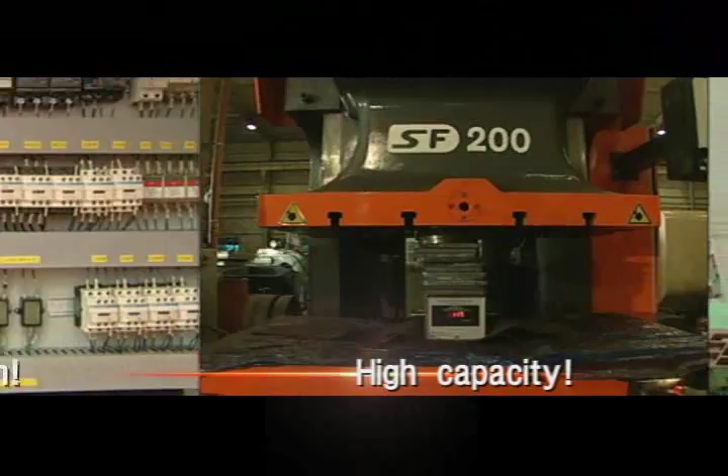We've been a leader of press-making companies in the 21st century. High capacity, high strength, and high precision. Dongshin Press prides itself on the best quality in the industry, representing the world's best press industry in the Republic of Korea.

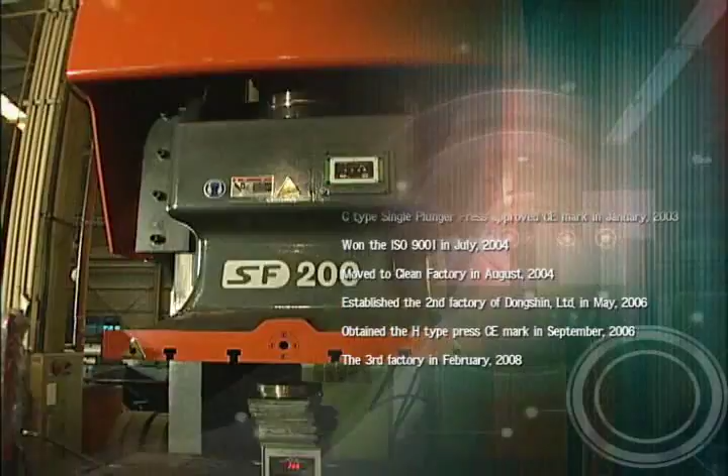A pillar of the Korean press machine. Since Dongshin Press was established in 1968, we have been producing the best press machines at superior quality. For only the press, Dongshin Press has been advancing toward a progression as a superfine enterprise of press manufacturing field that is built up on a technological know-how with justice and a substantial management.

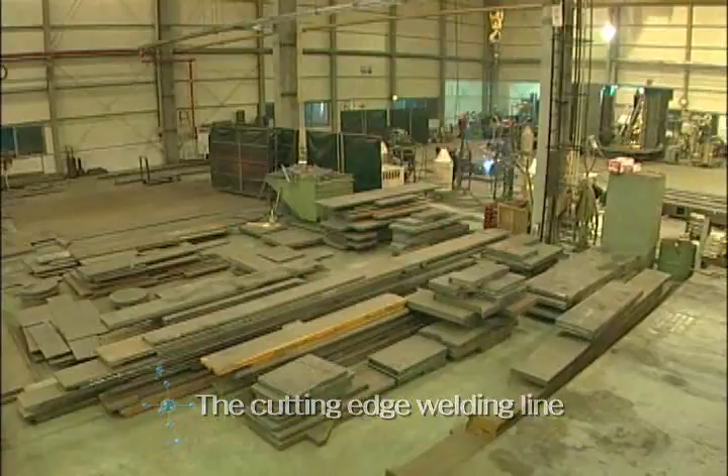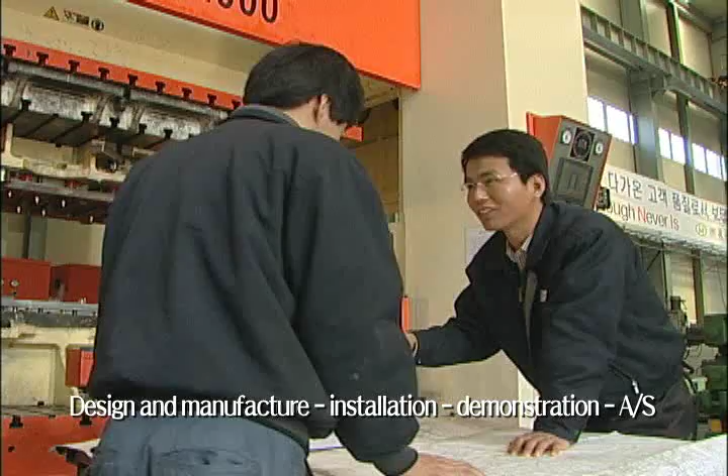We have high-tech welding lines, large high-precision processing lines, and the assembly lines with the best know-how. By managing all processes directly from manufacturing, installing demonstration to the AS, we are equipped with the internal systems to deal with a quick delivery in a timely manner.

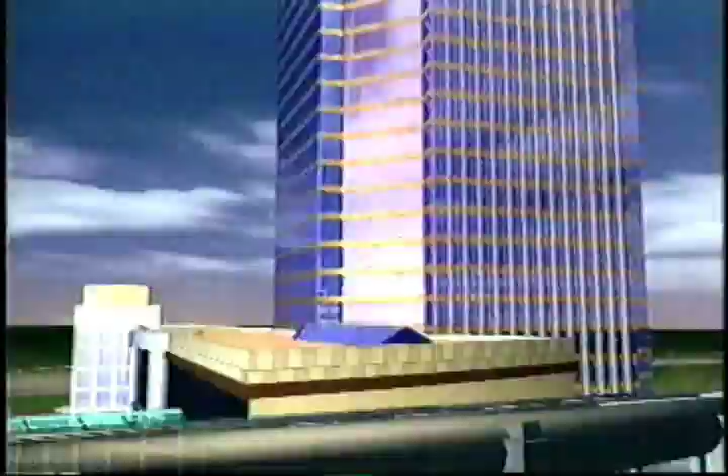Also, there are 3 factories running, including Dongshin Metal, a subsidiary company of Production Moldings, and 2 other factories that have finished the groundwork to complete construction in the first half of 2008. We are focusing on maximizing the productivity and enhancing the competitiveness.

Since the foundation to make the world's best press, our Dongshin Press has followed only one path. As the winner of many awards, we have been nominated the most promising of small and medium export companies. We have achieved a stable growth each year since the exports reached $3 million in 2003.

From the CE certification that meets the world standard to the ISO 9001 certification in order to build a quality control system, we are obtaining a superior position in the market with the recognized core technology, making it possible to run on the highway of marvelous growth.

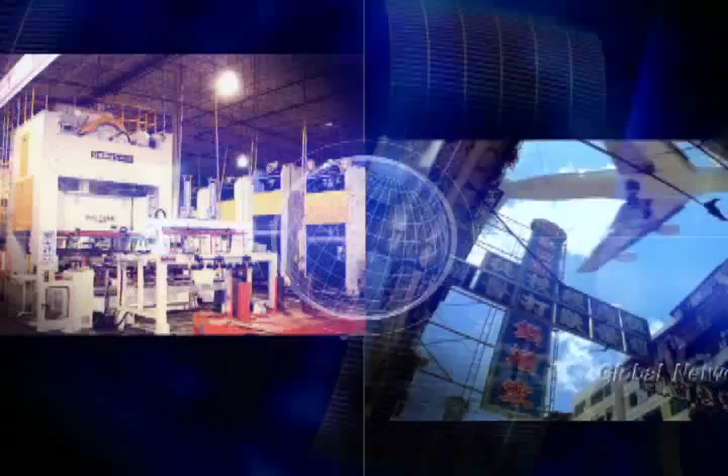Dongshin in the globalizing world. Dongshin Press has looked to the overseas market since 1999, starting from Southeast Asia market and now even to the ones in America, Europe, Russia, China, and Japan, etc. We are exporting to all countries of the world, and so far we have exported more than 300 units to over 30 countries around the world.

However, we are continuously endeavoring to have a constant investment on products and sales, as to open up a new market, increasing our market share with our accumulated know-how. High techniques with competitiveness. Dongshin Press, practicing a pioneering to reform with high technology.

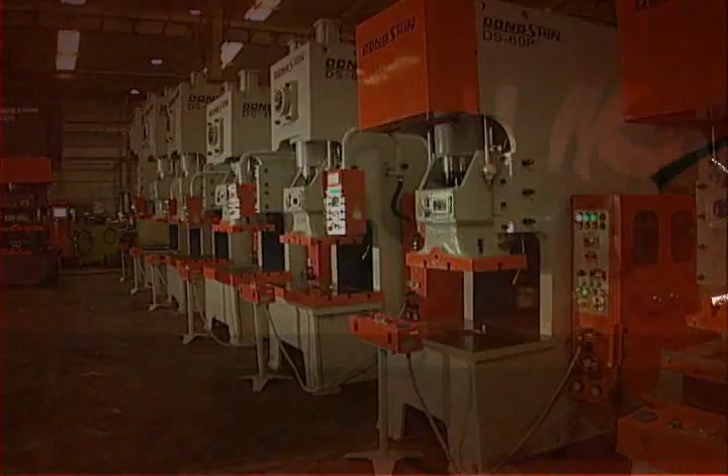With an idea that the second-place product technology cannot survive, we are implementing a non-stop research and investment for a product development along with a quality improvement. These constant efforts lead to the unique technique of our own that is proven by Dongshin's excellent products.

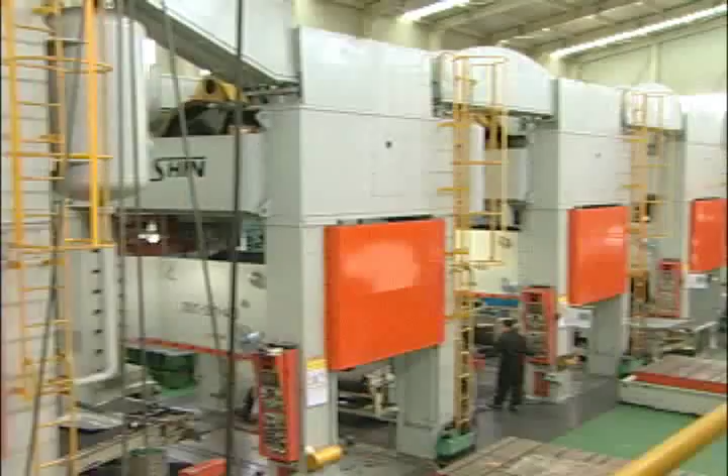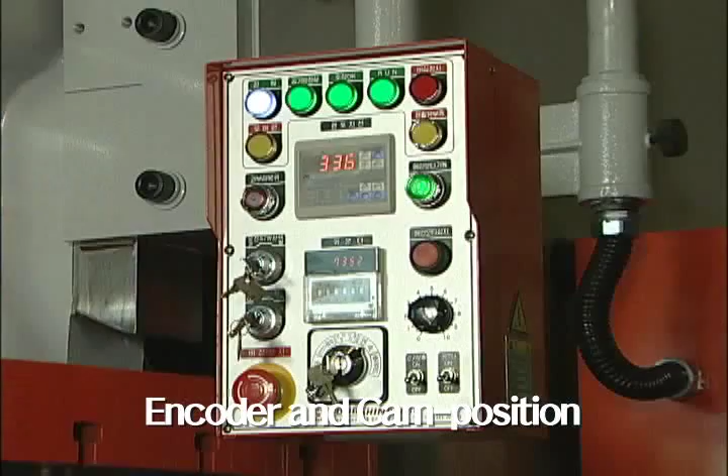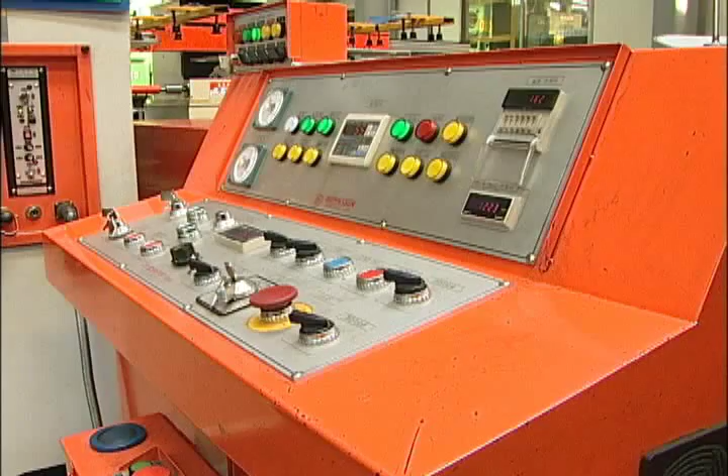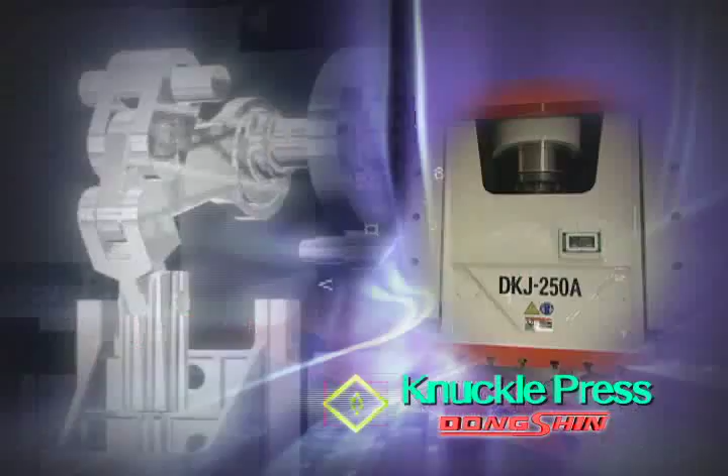Moreover, through a distinguished manufacturing from other press companies, Dongshin Press is making an effort to make a more practical product with strong durability. Revolution of the Korean press, Dongshin Press. By a pause motion stopping at a low dead point using knuckle tools.

When the machine starts to operate, it has a reduced vibration with a solid frame structure that functions based on a strong power and fits well to a high-precision product in which flatness matters significantly. Due to the recognition of its high price in the past, the demand was scarce, but it was reborn with an affordable cost after passing constant development. Now it's been settled as a Dongshin Press new strategic good.

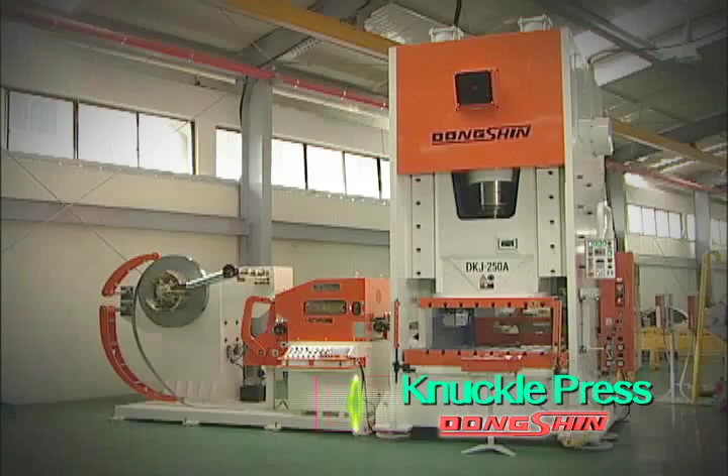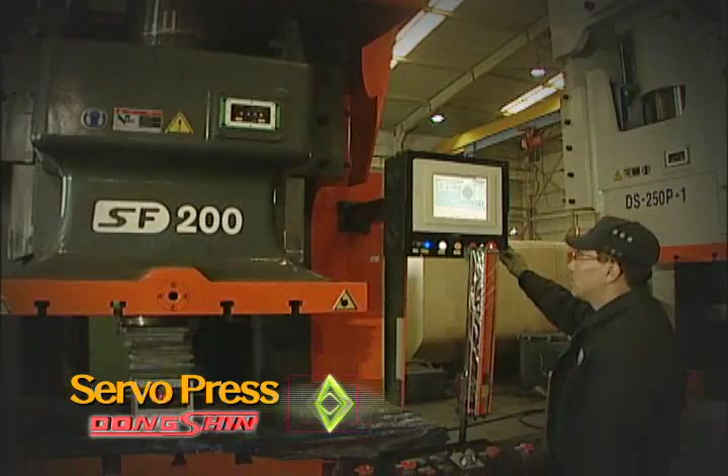Servo press is a product that can be customized for operating press motion as an alternative in the press market. It was studied and developed by Dongshin Press's own technology. Dongshin's efforts on popularization in the press are being continued. Given that servo press was developed in order to cope with various fundamental material changes in the future, we strongly believe that it is to be settled as a mainstream model for the future press market.

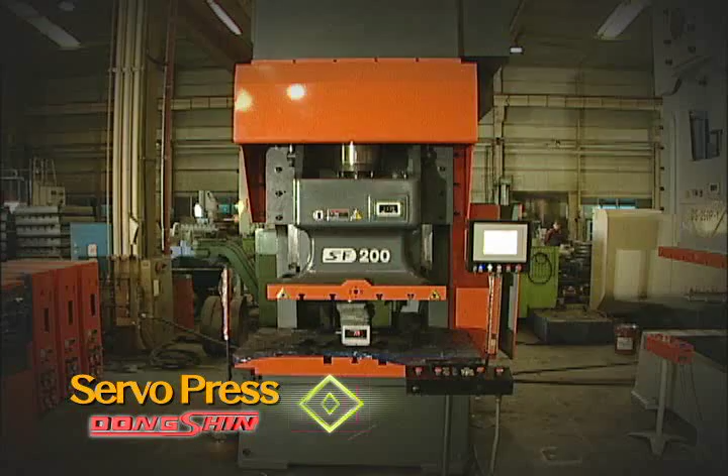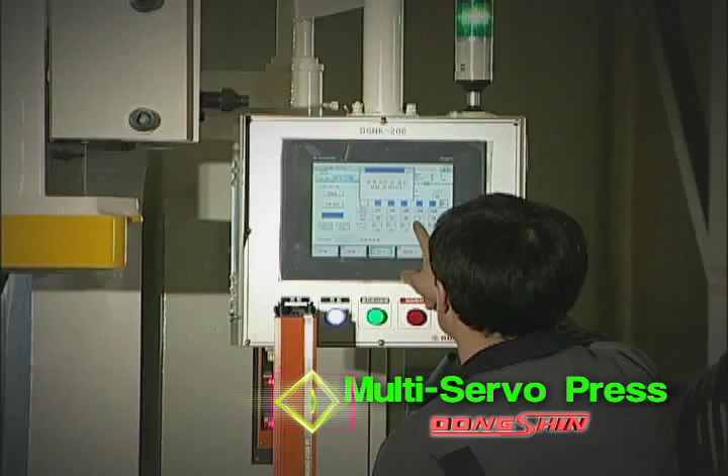Multi-servo press is a new product that has made a substantial price cut with its new unique technology, simultaneously maintaining the strength of servo press. Unlike the existing servo press, where the NC controller commands the servo driver in order to operate a servo motor, multi-servo press uses a different way: the PLC controller delivers a command to an inverter, which enables it to resolve a lot of technological problems. Hence, it is the product of unique technologies in various parts.

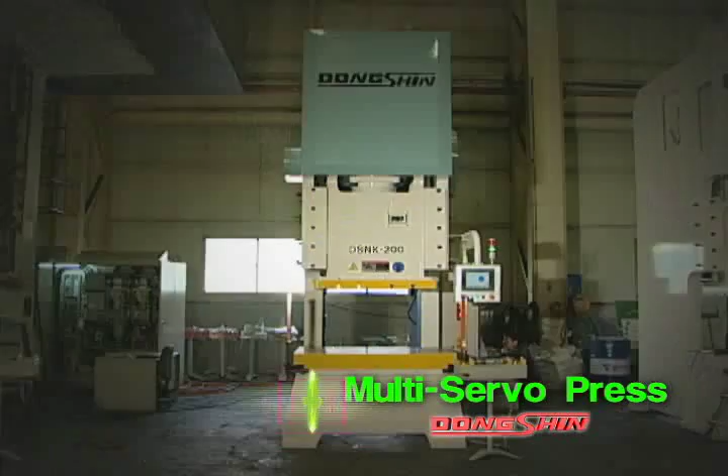Multi-servo press is the world's first crystallization of Dongshin Press's technological power. We are now shaking up the servo press market from a high unit price that foreign manufacturers such as Japan and Germany have dominated. By developing a low-priced public type of servo press, it will be a new landmark in technological development.

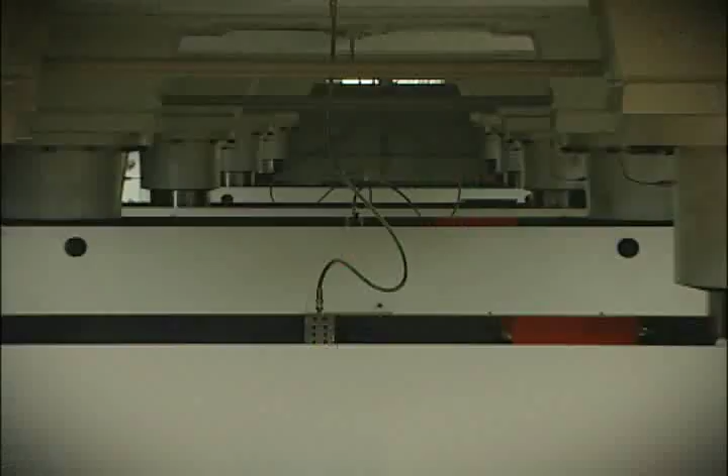This innovative press that satisfies with a good price and quality, as Dongshin Press's strategic goods for the next generation, is making a strong resolution as a new history and leader of the servo press market. Multi-servo press is applying for a patent at the moment, and will be completing the framework for mass production in the first half of 2008.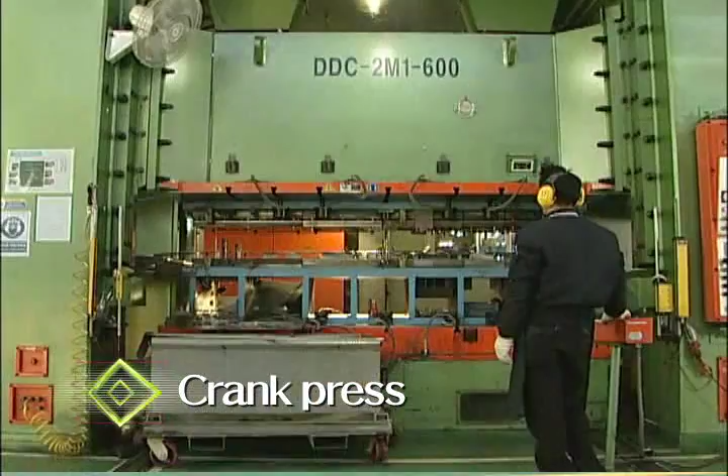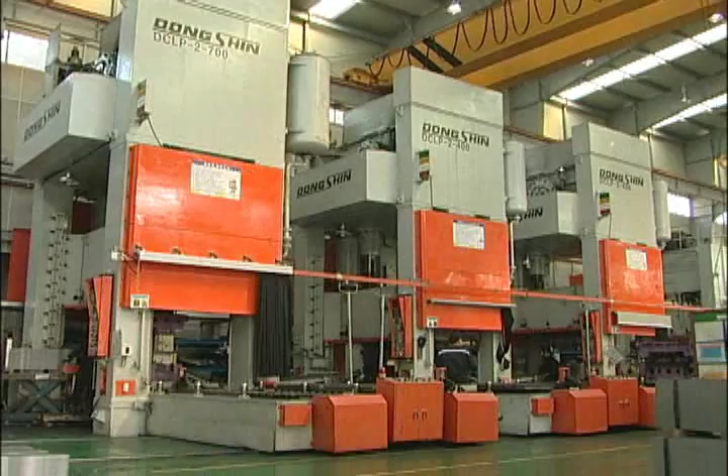In addition, Dongshin's plunger press prides itself on high precision with high parallelism, along with the most generally used crank press. During ram falls, it exercises at a slow speed near the low dead point. Link press is specialized in functions on drawing products. Crankless link press does not allow any transformation during a high load due to a powerful frame and can be widely applied for high precision processing products.

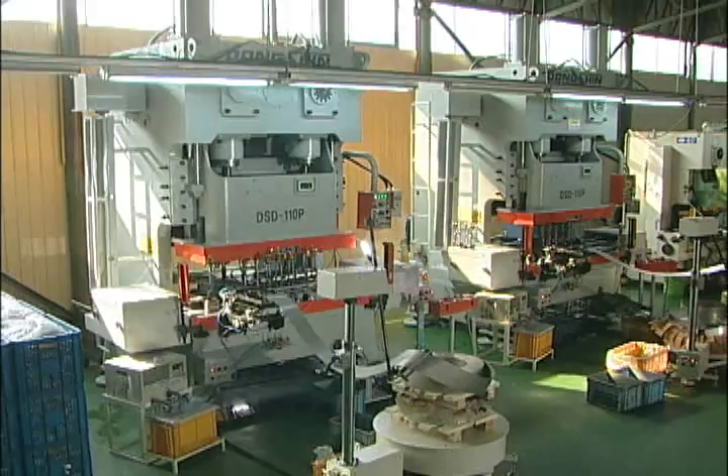Crankless link press combines the merits of crankless and link press. The techniques that have been accumulated from keen development and endeavors have become a solid ground of Dongshin Press that other rival companies cannot challenge.

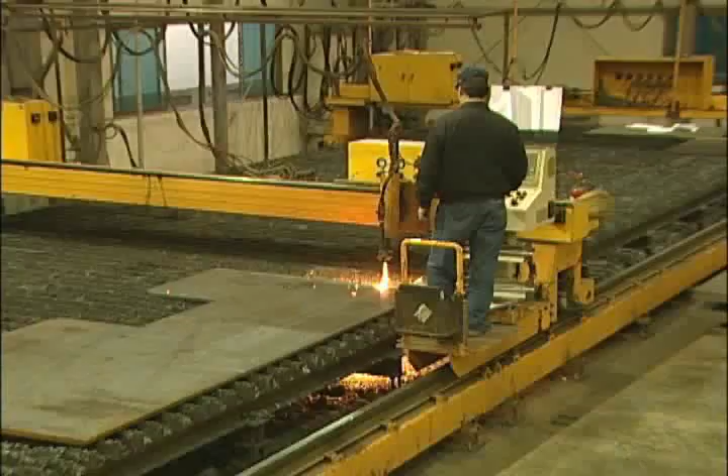Besides, for all products of Dongshin Press, from purchasing new materials, cutting, welding, heat treatment, frame processing, assembly, to coloring, all these processes are handled directly, so that it corresponds to customers' various demands, taking less time from order to delivery, and seeks high precision of press, processing with great quantities of the latest processing apparatus.

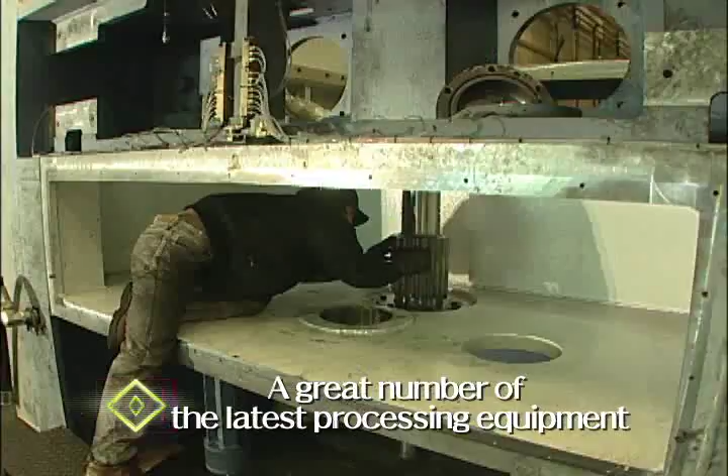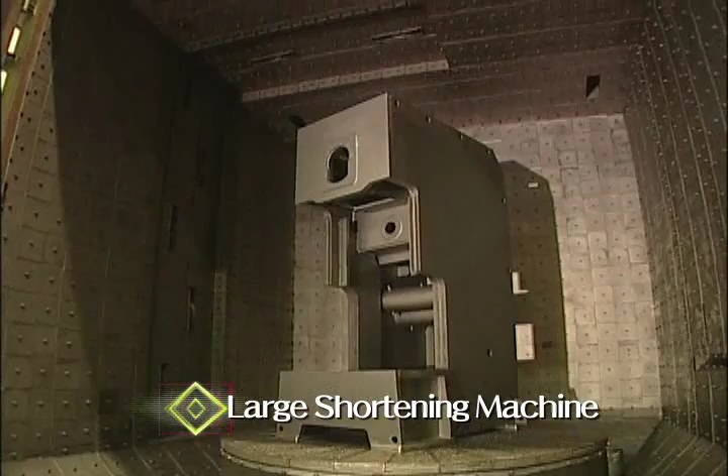Especially, Dongshin Press's pentagonal processing machine is able to process a maximum of 2,500 tons, and will be a footing for producing the high precision large press. And one more thing, the large shortening machine that can handle 50 tons of weight eliminates stress from the welded frame and enables after treatment on its surface, so it brings a cost reduction and a high-level completion of products.

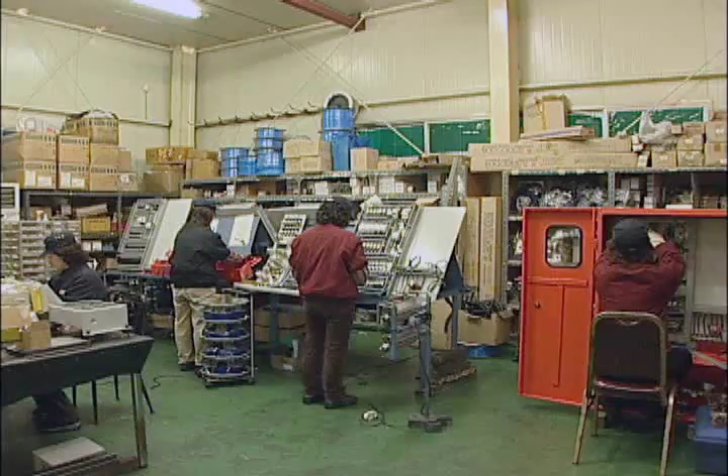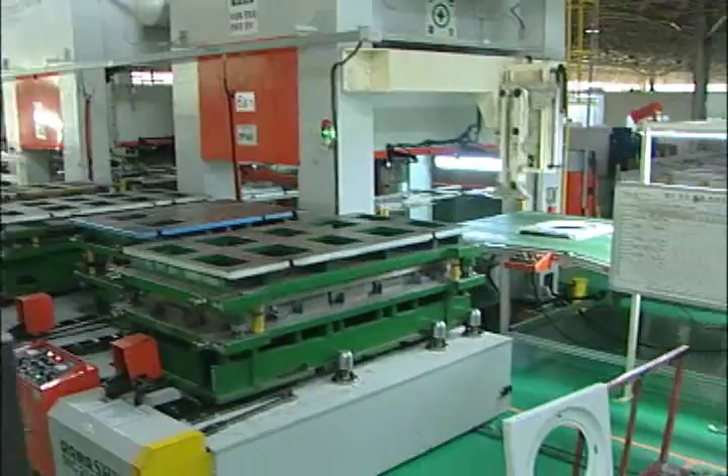In addition, armed with its own manpower and technology on electrical parts, the so-called brain and nerves of the press, we have got an advantage to correspond directly and rapidly to any part of the world, including domestic.

In the furiously competing domestic and overseas market environment, now keep your eyes on Dongshin Press, that stands for the pride of Korea press, and now the world market. Dongshin Press, recognized by quality, scrupulous post-management, and the best competitive power of high technique. We promise to stay prestigiously in the press machine industry in the future as well.